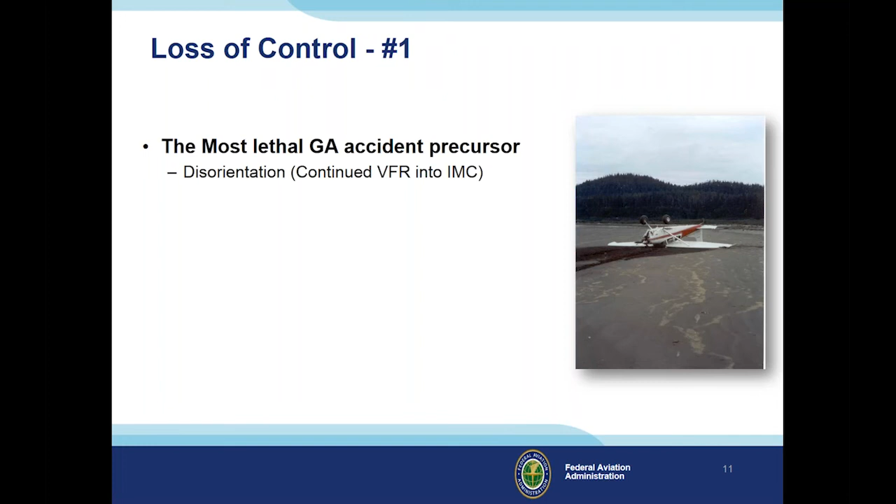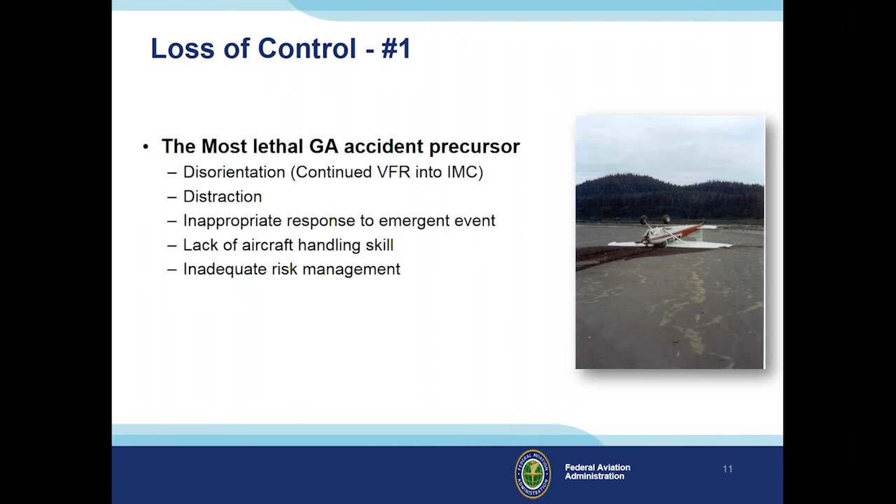Now, loss of control is a big issue. It's been on the NTSB most wanted list for a long time, and it's one of the major aspects leading to GA accidents and fatalities. There are all sorts of reasons it can occur: disorientation, distraction—think of that when we talk about the elevator trim stall this evening—inappropriate response to an emergent event, which we see with secondary stalls, and lack of aircraft handling skills. When we talk about the demonstration stalls tonight, all of those deal with that. Risk management, we're definitely going to be talking about that too.

So I hope you do pick up a lot of good information to help you be a safer pilot tonight. Now, in the practical test standards, we talk about proficiency, and then there's also demonstration.

And this is in the practical test standards for the flight instructor airplane. When we mention proficiency, what we're talking about is instructional knowledge, the what, why, and how of subject matter maneuvers, and that there is a requirement to do these maneuvers to a specified standard, which is at least at the level you would expect of a commercial pilot.

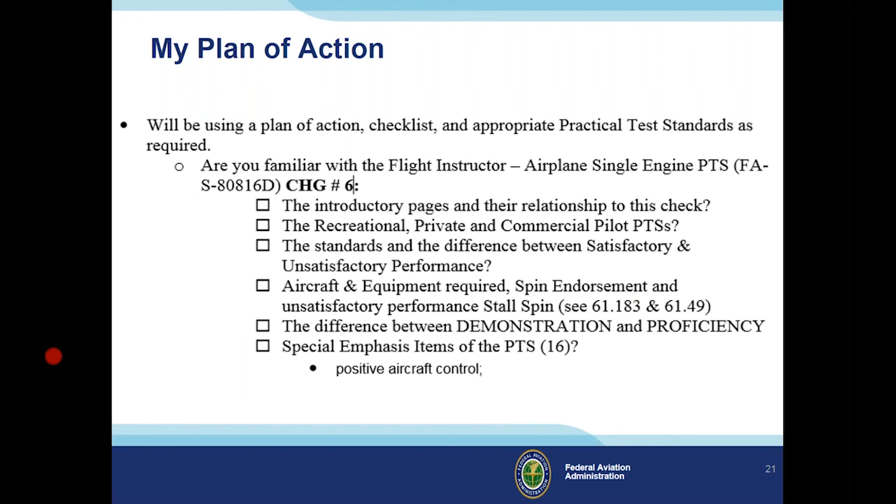One of the things I always end up asking applicants in the pre-brief is, are they familiar with the difference between the demonstration and proficiency maneuvers? It is a bit interesting, I usually get one of two reactions: I either get that blank stare and long moment of silence, or I get a look like, oh no, it's all going bad really fast.

We've mentioned this too, but I can't emphasize it enough: in recent years the accelerated stall has been added to the commercial practical test standards in the ACS. When that first happened, a lot of examiners dealt with it, myself included, where they asked, okay, let's go ahead and do an accelerated stall.

From over in the left seat, you'd get this look like, a what? What are you talking about? Still, every now and then I get examiners calling and telling me that XYZ flight school or instructor might be a little challenged because their student is completely unaware of what an accelerated stall is. Really, at the commercial level, they should have already seen at least one and discussed it with their flight instructor in training for sport, recreational, or private pilot.

I've been using the terminology PTS, Practical Test Standards, and ACS, Airman Certification Standards, because we are in the middle of that transition. I had in time past seen drafts of the Flight Instructor ACS, but we're probably coming up this summer is my assumption - we're probably going to see a draft come out on the instructor ACS. As I've been poking around, trying to find out as best I can, I think we're definitely still going to see these demonstration stalls in that new ACS. I don't think they're going away at all.

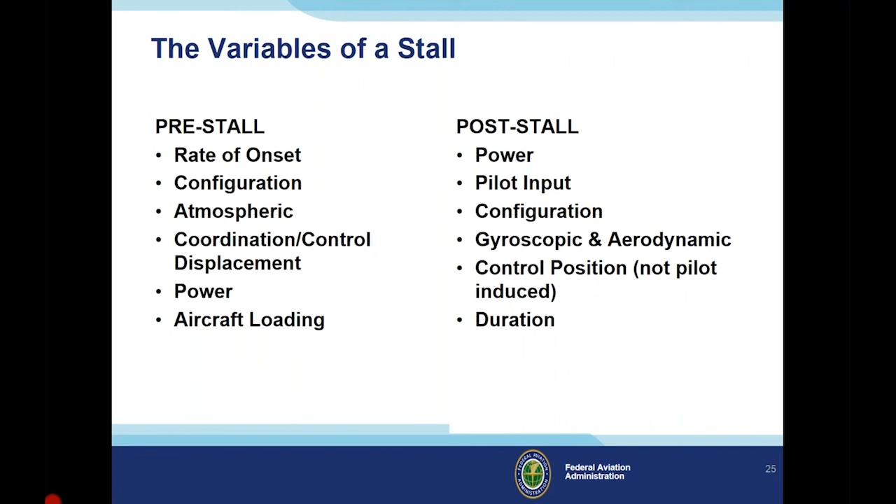Now, the cross-controlled stall - this is where we'll get into depth on each of the four different demonstration stalls. The first one we'll talk about, and I don't think it's in any particular order, maybe it's the same order as in the airplane flying handbook, I don't recall. But a cross-controlled stall occurs when the critical angle of attack is exceeded with aileron pressure applied in one direction and rudder pressure in the opposite, uncoordinated flight. A skidding cross-control stall is most likely to occur in the traffic pattern, base to final - we're probably all familiar with that.

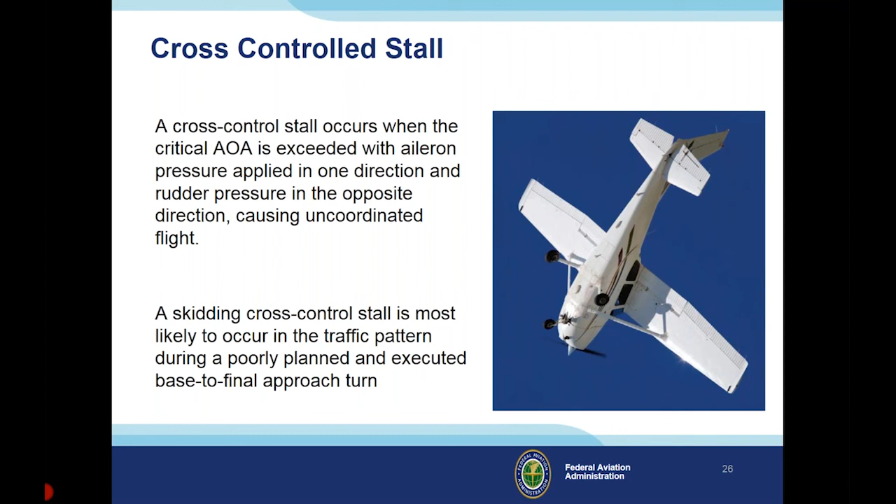Here's actually, this is for the glider types out there, but this is a good video. The Soaring Safety Foundation has a bunch of trigger videos, both on their website and out there on YouTube, where you can play them and use them as a way to discuss what's going on. So I'm going to go ahead and play that. It'll take a second, this tends to work much better. About 95% of you should be able to see this.

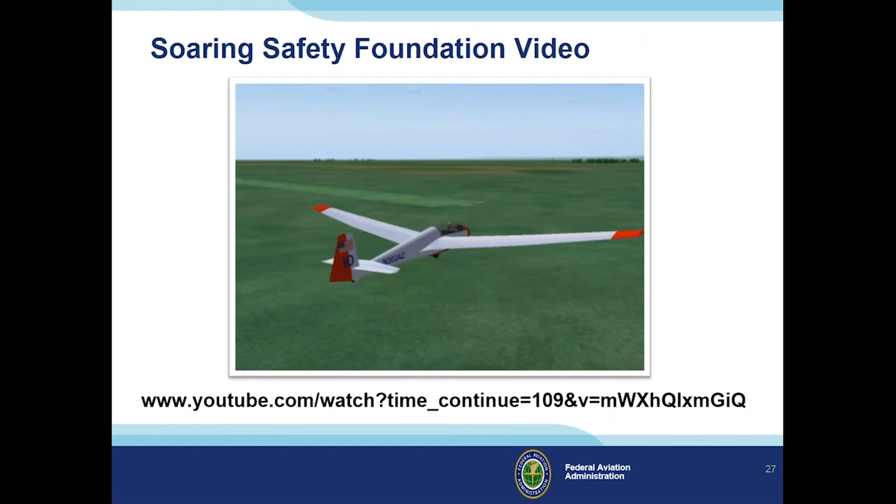That's kind of an interesting little video there. There are multiples out there on YouTube that you can use, but that's the Soaring Safety Foundation - they have some of these trigger videos, and they have that one specifically on the cross-controlled stall. I will specifically note, for those watching the recording at a later date, the videos played in this format in the recording you will not be able to see, but where I can, I have put the web address so you can find them on your own. You can do the old screenshot trick or type the items in.

And we want to be aware of what we end up doing in relation to flying and all of this. I bring this up as a bit of a segue from a safety perspective. If you're doing more dynamic maneuvering, you want to assure yourself that you're doing it in an appropriate aircraft and also with an appropriate instructor.

This is actually some video from spins that I had done at a previous work establishment that was used in some video training, doing some cross-controlled spin entry in a Cessna 152, which is a terrific little training aircraft and has had it. But my safety aspect to this is I just want to point out, this is that same aircraft a few years later. And this is kind of my safety caveat to it.

Believe it or not, that same aircraft was in a fatal accident that ended up being a very prominent accident that led to an airworthiness directive that put limitations on the Cessna 150, 152s unless the larger rudder horns were installed on it. This was an instructor and a student out doing spins, and the rudder horn ended up getting locked over on the stop bolt.

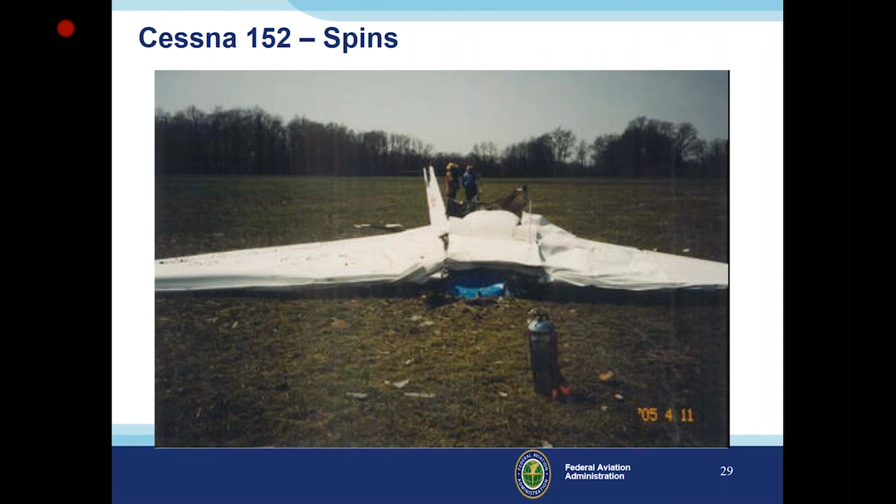The next type of stall that we look at on the demonstration ones, we just looked at the cross control, is the elevator trim stall. This is what is labeled in the airplane flying handbook. Basically what we're looking at is setting ourselves up and doing an approach to landing, having it trimmed, configuration for landing, trimmed for airspeed. I myself, when I do these with students, usually ask them to set it up for a short field landing.

That way they're at the largest flap setting and most likely very close to the most nose up trim that they can be at. In fact, they're probably pretty darn close in a single engine airplane to full nose up trim. And then deciding to go around for whatever reason it may be.

It may be that you had a hard landing and bounced. It may be the classic deer runs out on the runway, or the runway has not cleared soon enough. And what happens is as you add that power to simulate the go around, the nose starts pitching up significantly. It'll vary in different aircraft with it, but looking for that.

And the other thing that I point out to students in this is if they're distracted enough that they're letting the nose pitch up too high, that they're probably also distracted enough in the airplane not to be applying that right rudder. Now, what we want to do is point out to them the dangers of how quickly that nose rises up and approaches a stall, and also how quickly the aircraft can be in a situation that it is just not coordinated due to the power and left turning tendencies of the aircraft.

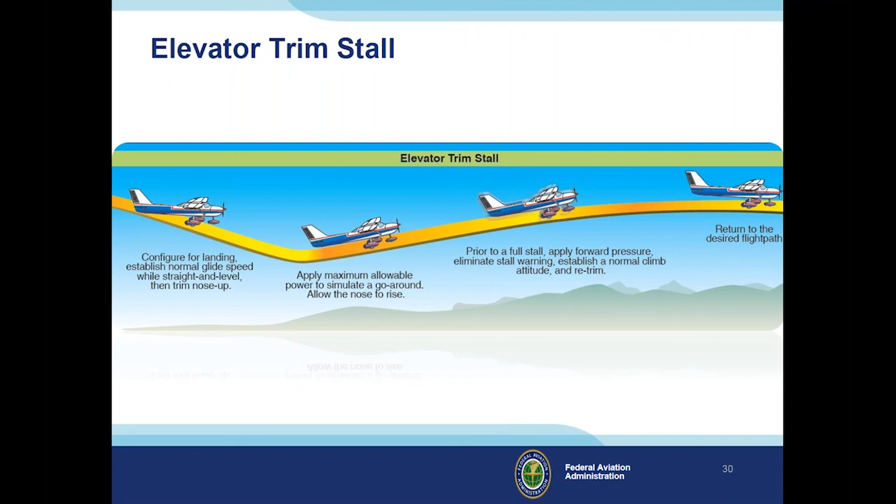So at some point we should go ahead and practice this with the students. We have a video here that I want to show you in relation to it. I do apologize, there is a small amount of adult language in this. I think given the circumstances when you watch the video, it is appropriate probably. You can understand why the person says it, but I just do want to give you fair warning on that.

This is what we kind of call a botched go around. This is a video that those of us in the safety program have been using for a little while. Particularly what I want you to look at is not only how quickly the nose pitches up, but also take a look at the rudder in this. I'll probably play it a couple times.

And for some reason, so I'm going to go ahead, I'm going to bring in full power.

So you can see the nose comes up very quickly in an event like that. You can also see the left turning tendencies starting to have an impact, and that's an elevator trim stall where it's recognized and it's recovered from, done at altitude for demonstration purposes with a student. It's really tame compared to what it may be like in the actual aircraft if you have a problem developing.

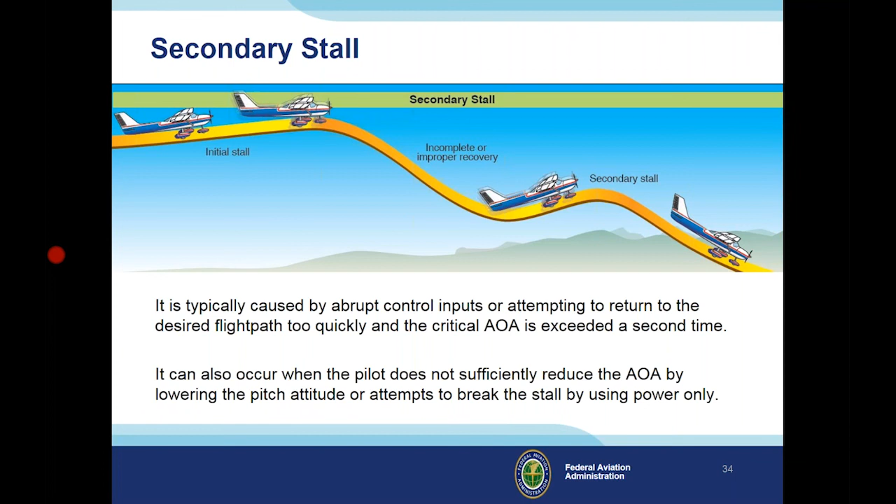What we tend to see is that new, nervous pilots tend to be the ones who recover but then snap back into the secondary stall, whereas pilots who've been flying longer in piston powered aircraft tend to rely heavily on the power. And it's not a comfortable feeling.

You go and do an unusual attitude recovery course or something like that, hopefully, and if you've got the appropriate aircraft, you take a look at stalls in vastly different attitudes.

One of the things I've almost always done in teaching unusual attitude recovery type stuff over the years has been being on a downline, stalling the aircraft. This is very exciting to someone who hasn't seen it before, but it completely makes sense when you go through it with them - being on a downline, stalling the aircraft, where you're 90 degrees nose down, and you pull the nose up.

Pull the nose up to, say, a 70 or 60 degree angle sharply and suddenly, and it stalls, and you have to go back close to 90 degrees down to recover it. Doing it on an upline is another thing - you'll hear some interesting names for those, which we'll talk about here in a little bit.

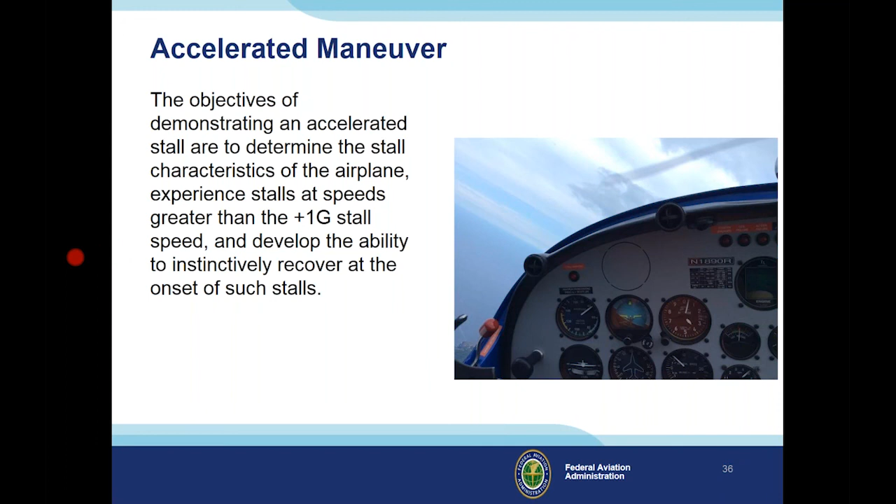Accelerated maneuver stall is the next one. This is right out of the Airplane Flying Handbook also, but basically what we're looking at is stalling at greater than 1G and developing the ability to instinctively recover. Like I said, we see that on the commercial PTS, and it's in both the multi-engine and single engine practical test standards.

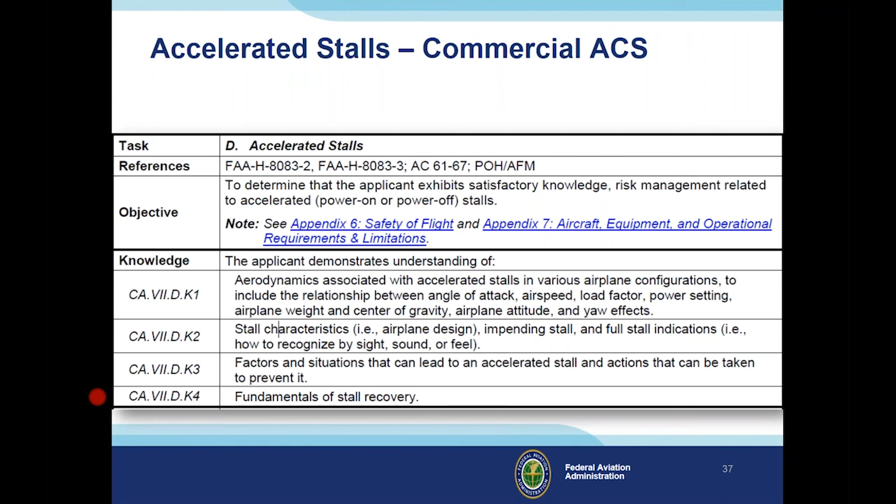So an important part to think about with this, because it does have some added risk. It's dependent upon your aircraft on how much, but you definitely want to take a look at Appendix 6 of the ACS on the safety of flight issues with it. And this is what it has to say: you really should be doing this at or below VA. Initiate stall recovery procedure at the first indication of a stall.

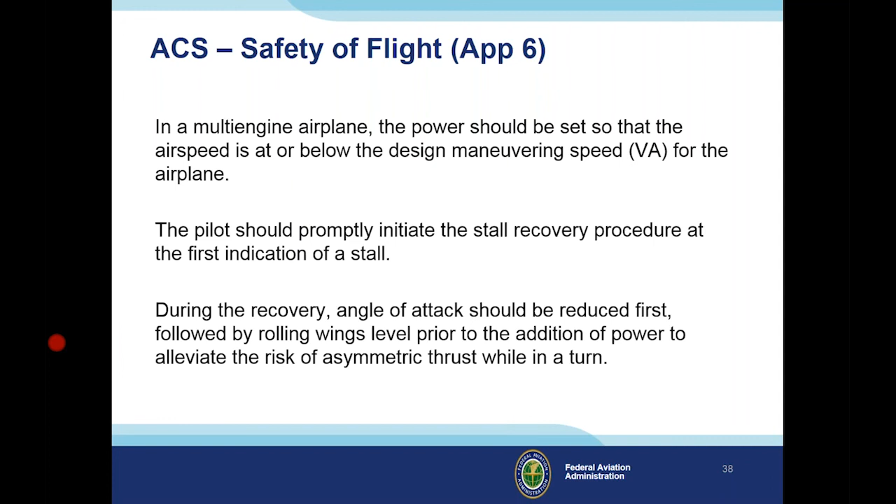Reduce the angle of attack. Don't try powering out of it, which is the issue we talked about on the secondary stall, because especially in a multi-engine, you can really throw in some significant yaw quickly if you have an asymmetrical thrust issue. Delaying the power application, assuring that you're above VMC, and this is something that we're looking at.

We used to have this, actually, believe it or not, in the ATP practical test standards, where we had specified values for altitude loss and that sort of thing. And if you go back to those pre-stall and post-stall variables, all of those have factors on how much altitude you will end up losing in a stall recovery.

Given certain conditions, you may only lose, say, 50 feet. Given other conditions, you may lose 300 feet in a stall recovery, all in the same aircraft, but in completely different conditions on altitude, weight, power applications, control inputs, configuration, all of that. What it goes back to say is, there's a multitude of external and internal variables which affect the recovery altitude. And that goes right back to what we talked about earlier on those pre and post stall variables.

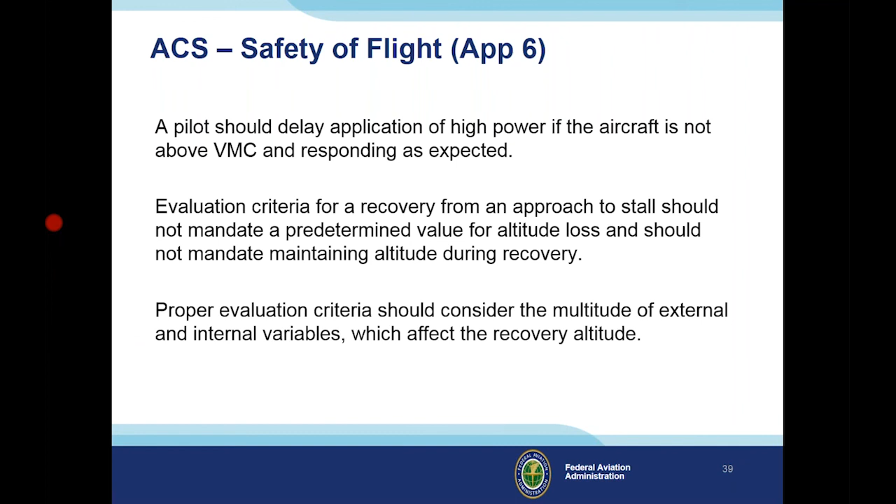So an accelerated stall coordinated. In the practical test standards and in the ACS, you're basically going to be doing this at 45 degrees of bank. Yeah, I would consider that a little bit on the shallow side to make a prominent point. So I would probably encourage, as an instructor, if you've got the aircraft capabilities and comfort, maybe think of doing it up to about a 60-degree bank turn or so.

And here's one of the classic questions. We're going to do another poll question here. Here is one of the classic questions that we will ask on a flight instructor practical test. So I just launched that. John, I'm going to ask for your help again. You betcha, buddy. Here we go. The question: you stall the aircraft in a coordinated 60-degree steep turn to the left.

Which way will it spin? Choice number 1, left spin. Choice number 2, no spin. Choice number 3, right spin. Choice number 4, over on its back and an inverted spin. And choice number 5, why? So go ahead, once again, click on your answer and let us know what you think.

And we're just passing through 50% of 316 plus people. We're getting a bit more variation in this, aren't we? Yeah, we are. If you can see it, John, but we'll show it to all of you here in a moment. Yeah, I've got so many things open on my screen right now, Steve. I'm afraid to click on the button for that one because it'll all blow up. All right, we're passing through 1 minute. We got over 75%. Last chance going. 3, 2, 1. We'll close it out and we'll share that with everybody. And again, I'm going to need your help with the sharing.

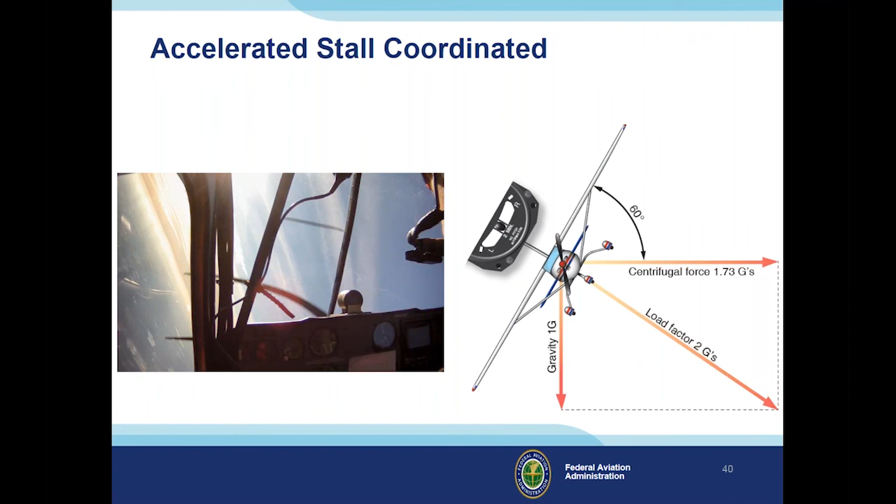And what we're looking for with the instructors - or I got one other thing to jump into here - is do recognize and think about this: there is a bit of a difference when we're looking at accelerated stalls in a vertical plane, up or down, or up line or down line, like you see at an air show, versus those in a horizontal plane as we're flying, left or right, because of the load factors that are prominent on an aircraft.

Almost all aircraft are not necessarily designed for it, and you'll see manufacturers saying certain types of stalls are not allowed. You'll see, Cessna uses the terminology whip stall, Diamond Aircraft uses the terminology dynamic stall. You'll hear them also called aggravated stall or zoom stall.

A lot of this is appropriate for a lot of different categories of aircraft. The next thing is a short little video - this is actually a hang glider, but it makes the point. This is what we call a zoom stall or a whip stall, and for those that fly weight shift control aircraft, this is a very, very dangerous thing. So we're going to go ahead and take a look at that.

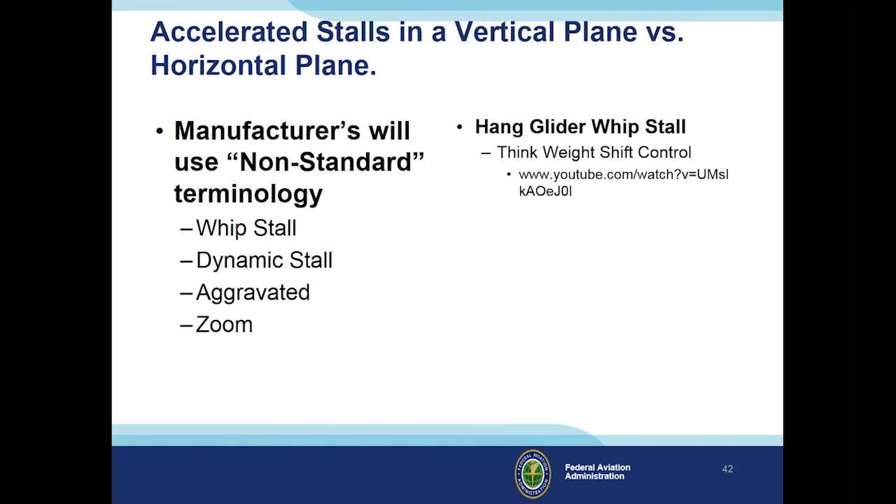But what we're really looking for in all of these things we're doing is that a flight instructor understands the flight envelope and where things occur, and accelerated stall, where that ends up occurring, and how you can stay safe in the aircraft.

So that's what we're looking for. Does a flight instructor understand this regime and where it can go? When we do a horizontal accelerated stall, say at 60 degrees of bank, what we're looking at is the stall occurring at a load factor of 2 G's.

If we do it in the vertical plane, what can happen is we now have the change in direction of flight, and the amount of nose-down required for the stall recovery is basically proportional to the amount of nose-up. So if you bring the nose way, way up high on the stall, you're probably going to have to bring it way, way down in your aircraft. That's one of the things shown in that video.

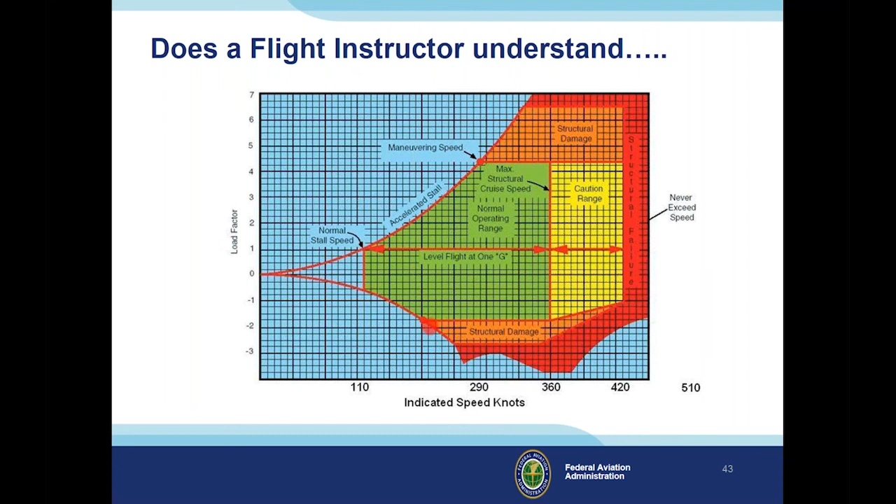What can happen in those circumstances is you go from a large positive G to a large negative G, and aircraft are just not designed to withstand the negative G's anywhere near as well as the positive G's. You can end up in an area of structural damage or much, much worse.

We also want to make sure that student and instructor understand the impact of it. If we are doing a horizontal plane accelerated stall at, say, 45 degrees of bank, what we're going to look at for a load factor is probably just about 1.3 G's or so, and we're going to see maybe about a 20% increase in the stall speed.

Now, granted, you may be dealing with instrument errors also because you're getting a larger angle of attack. But even an aircraft that stalls at, say, 50 knots in straight and level, 1 G, 1 knot per second deceleration doing the stall, what we're all familiar with in our training, a 20% increase is only going to bring you up to 60 knots on the stall speed. It's going to be a pretty small variation between 1 and 1.3 G's and 50 and 60 knots on the stall speed. That's what we're looking at in the testing.

But you'll notice that as you get to larger bank angles, this gets pretty high pretty darn quick. As you end up at 2 G's at a 60-degree bank turn, we're all familiar with that, but your stall speed is increasing by like 43% in relation to it. So we're seeing a pretty significant increase.

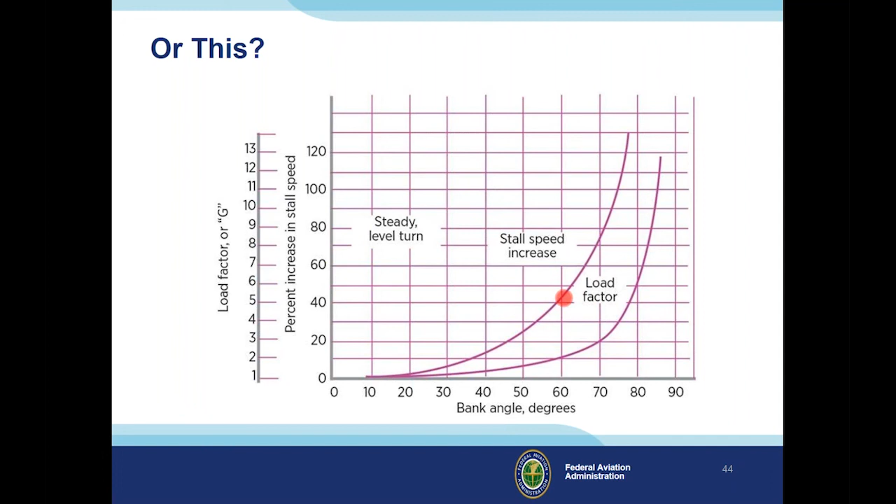That 50-knot stall speed at level flight, at 60 degrees of bank in that same aircraft, is going to be up at, doing quick math, 73, 74 knots, low 70s, I would assume. I hope I'm right.

Now, as we depart, just a few things. I hope tonight has helped you understand demonstration stalls, what they are, how they're related to safety and loss of control, what you want to be aware of that exists in the practical test standards in the ACS. And it is a little bit different. For flight instructors, we're looking for them to do the proficiency stalls and have instructional knowledge, and be able to do the demonstration stalls and have the instructional knowledge of them.

At the commercial level, we're looking for the proficiency stalls and the accelerated stall as a proficiency maneuver. And we expect that the person have the stall-spin awareness associated with the other 3 demonstration stalls, that's the cross-controlled, elevator trim, and secondary stall. And we saw that in the risk management.

And the same thing in the private, we expect them to have knowledge of it in a risk management perspective of the 4 demonstration stalls: elevator trim, accelerated, secondary stall, and cross-controlled stall.